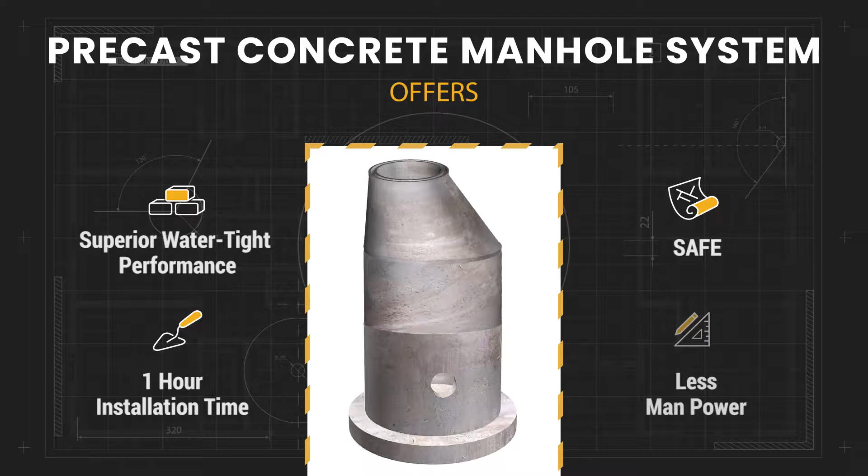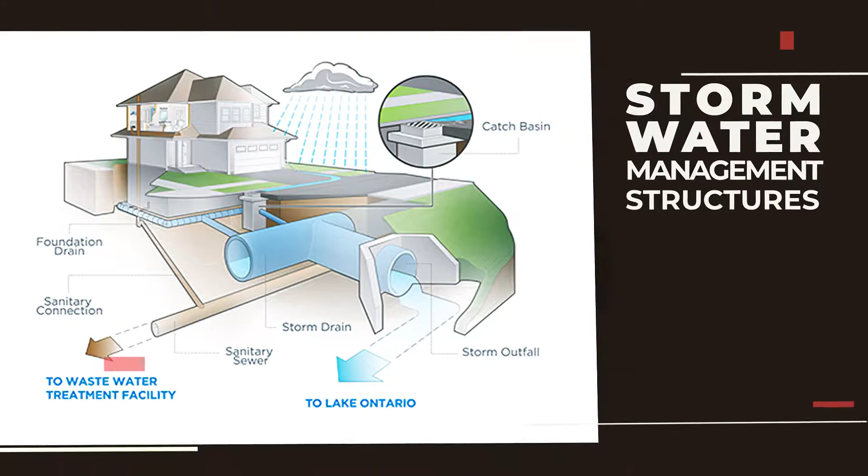Precast manhole systems are very safe and take only 1 hour to install as compared to 3 days in the conventional system, with comparatively less manpower. They are good choices for pump stations, wet wells, storm water management structures, impoundment, and overflow structures. All manholes and vertical structures can be provided for highway, railroad, and aviation loadings.

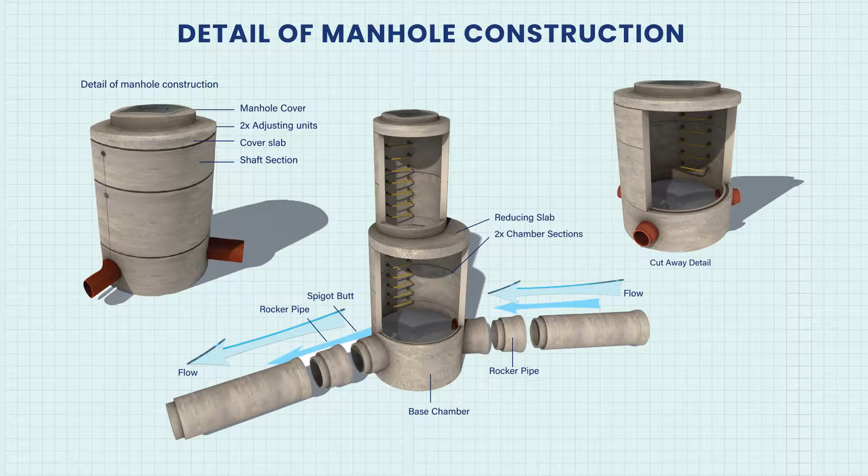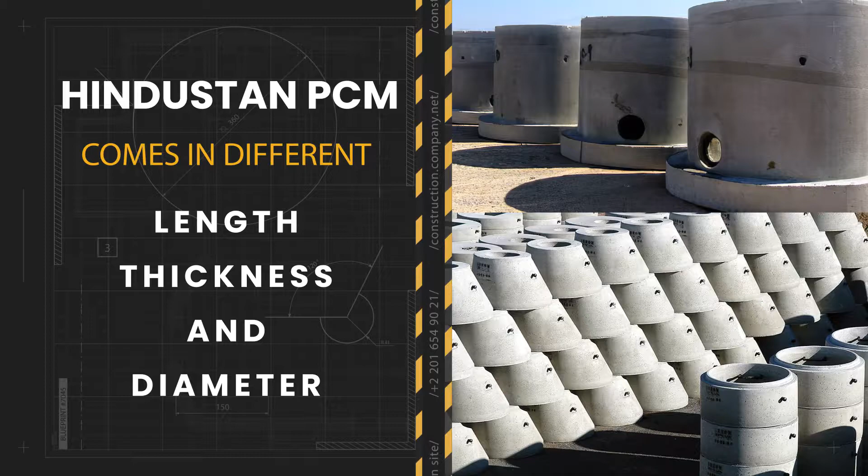After extensive research, we have launched a perfect manhole system to meet the challenges of urbanization and smart cities: the Hindustan Precast Manhole. This unique system combines to form the perfect manhole, designed to last for 100 years. Our range of precast concrete chambers can be availed in different lengths, thicknesses, and diameters based upon the requirements of the clients. The parts of the precast manhole system.

The first is the base section. At the bottom we have the base section, which comes in diameters of 910 mm and 1220 mm. The base section bears the entire load of the precast manhole system and provides the strongest foundation for heavy vehicle loads.

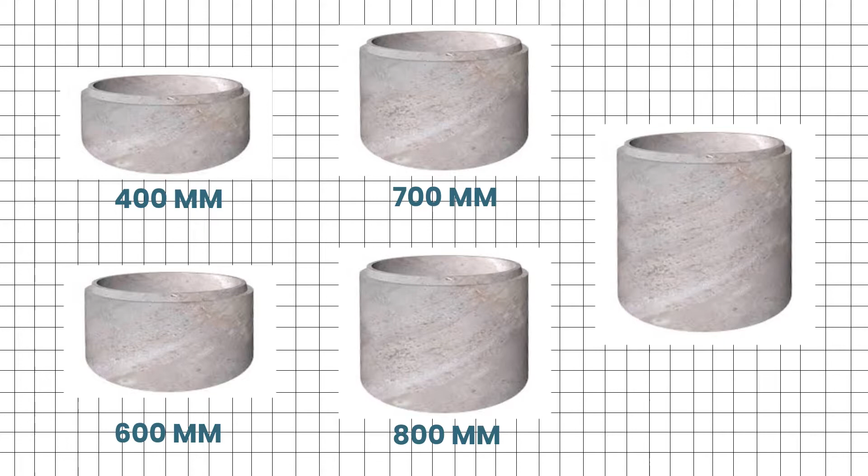The second is the riser section. Above the base section, we have the riser section, which provides the safe access connection from the ground level to the pipes. We have risers of different sizes, which come in heights of 400 mm, 600 mm, 700 mm, 800 mm, and lastly 1200 mm.

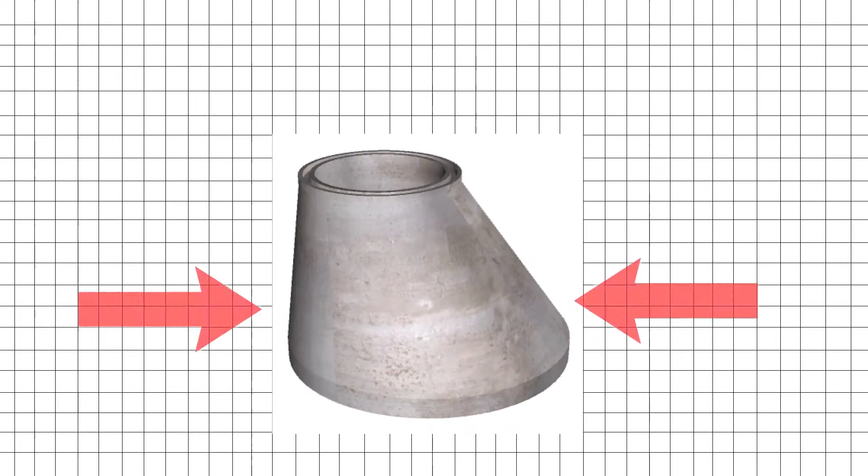The third is the cone section. Above the riser section, we have the conical section, which is used to decrease the diameter to 600 mm to provide enough space to enter inside the manhole. The fourth is the cover. A flat slab is used to access the manhole system. This is designed as per the Indian standards of heavy duty and extra heavy duty class.

Hindustan Precast Manhole Systems, a result of extensive research and cutting-edge technology by Hindustan Tiles.